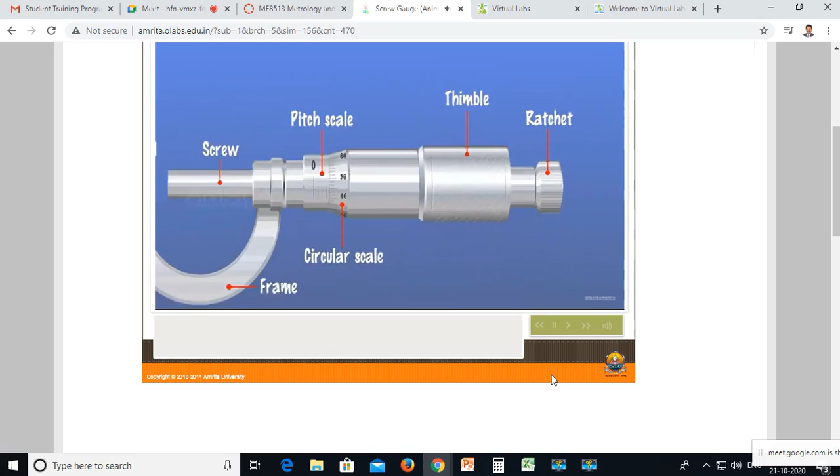Screw gauge. Let's understand the working of a screw gauge. The main parts of a screw gauge are stud, screw, frame, pitch scale, circular scale, thimble, and ratchet. Aim: to find the volume of a lead shot or a wire of irregular shape.

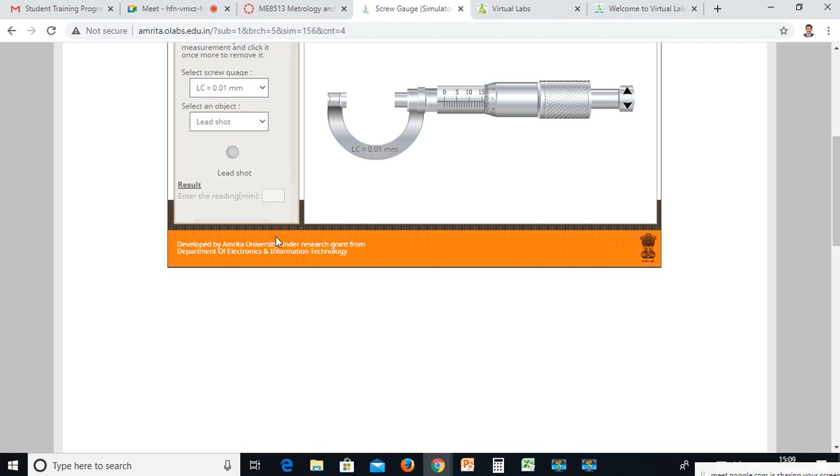Now I'm using another component. Now it is 1, 2, 3, 4 and 33. So 33 into 0.01, which is nothing but 0.33. So it is 1 to 4.33, and let me check the value again.

Let me tell you what is happening here actually. So this is how we have to do a virtual laboratory here. Do you understand, sir? Okay, similarly like this, I'm having one more experiment.

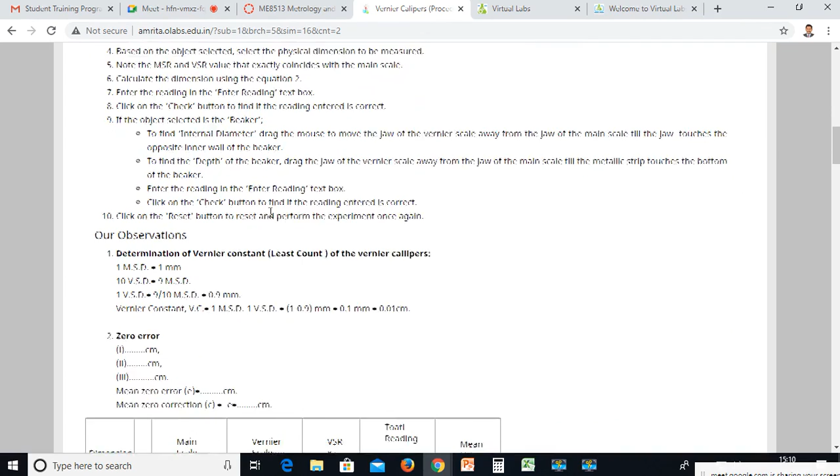Which is related to our particular Vernier caliper, similar to that of our laboratory. Again, you can see we have a theory for Vernier caliper, and a procedure for how to do the particular exercise. They have been very clearly mentioned. If it is one main scale division and 10 Vernier scale divisions, how it has to be done, everything is given very clearly.

So let us go to the simulator directly, because it is very important for us to verify it very clearly. Okay, now I am taking an iron block, and I am trying to move here.

Okay so now, kindly tell me, see here, this value is 4, this value is 4.1, it is actually coinciding here.

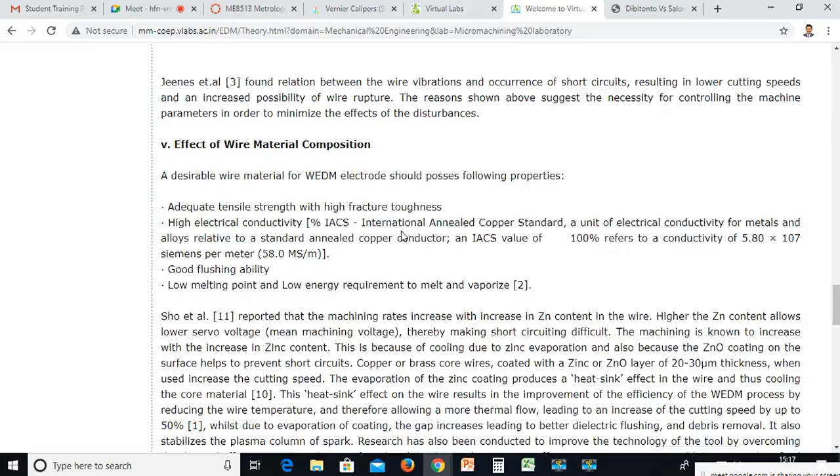That wire is used for machining. This theory part is available in all the virtual laboratories. Whatever you want to learn about the particular machine is available in the theory part, and then the very important thing is the experimental setup.

So what is a simulator? A simulator is nothing but the same work which is going to be done by a machine, simulated. I hope you can see this.

Now let us see, without operating the machine, let me find out by giving an input parameter what the output parameter becomes. Let me take one example.

If you take a lathe, speed is an input parameter, feed is an input parameter, depth is an input parameter. Can anyone tell me what is the output parameter from a lathe operation, sir?

What is the output parameter you will be measuring in your lathe exercise, or simply a turning? What is the output you will be measuring? Diameter, sir, that is the dimension.

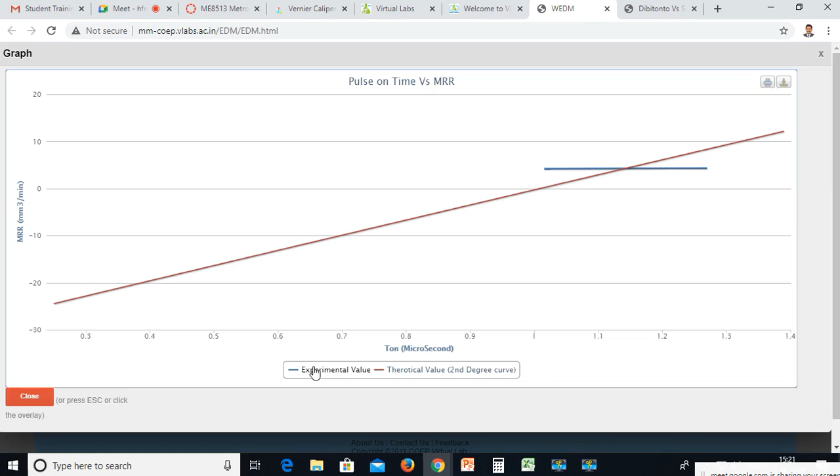So to show the difference, I am going to increase the number of experiments and show you the graph only for the difference purpose. Now can you see the difference in the graph? You can see this blue value is the experimental value and this red value is the theoretical value.

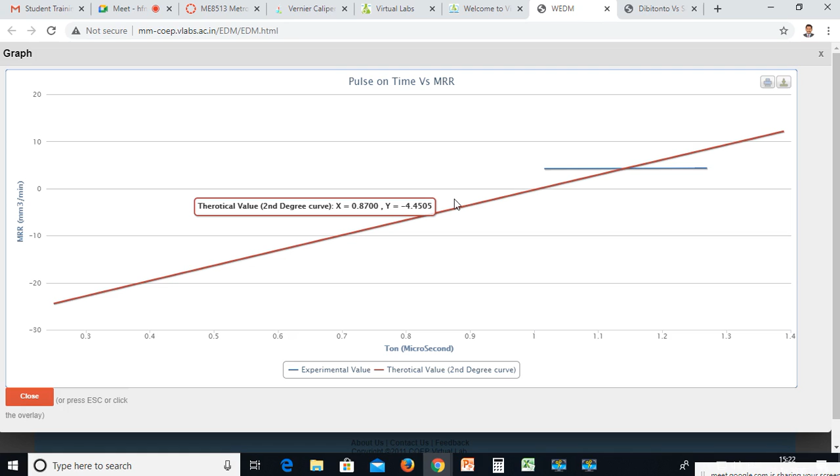So I didn't even visit the place where the machine is available, I didn't even operate the particular machine, but I have conducted the exercise, taken the output, and plotted the graph. This is one beauty of the virtual laboratory.

So for example, many of you may not know about wire EDM, but we have learned a few things about wire EDM. You may have some concept of it now.

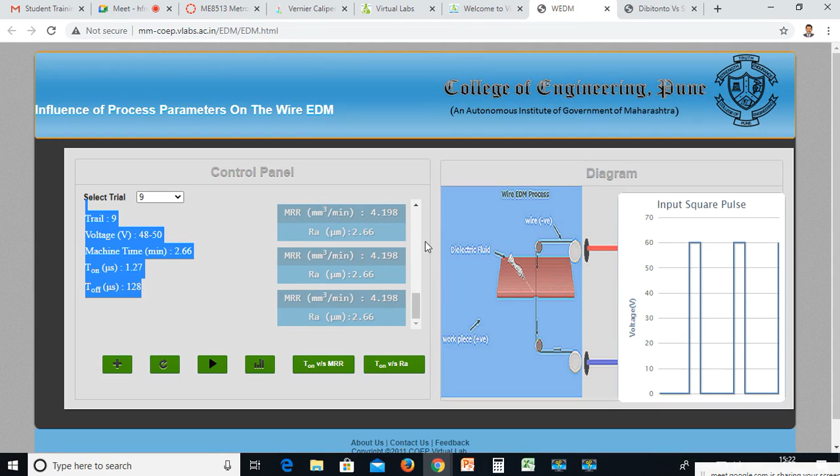So this is the benefit of this particular virtual lab. Similarly, we have plenty of exercises in our virtual laboratory.

So it is our objective for you to go across and come across all these laboratories, and you can come up with an idea, sir, that this virtual laboratory can be created by our college.

For example, sir, we can create a virtual laboratory for a mechatronics lab, sir. We can create a virtual laboratory for thermal engineering, sir. We can create a virtual laboratory for engineering graphics, sir. This is the main motto of this induction program.